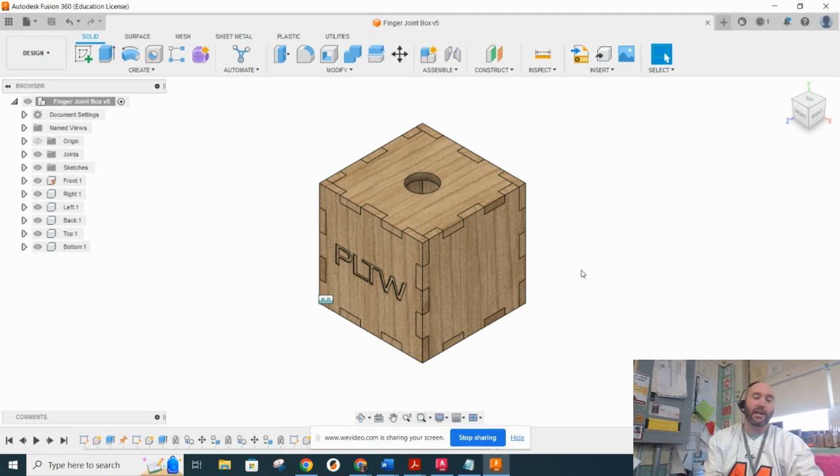What I'm going to do is create a drawing that I can export out into AutoCAD. In order to do that, I'm going to switch this over into my drawing environment, create a drawing from my design, use my own custom title block, and go ahead and say OK.

When this comes in, you can see the front's coming in. I want this to be a full 1-to-1 scale, so I'm going to drop that in there and say OK.

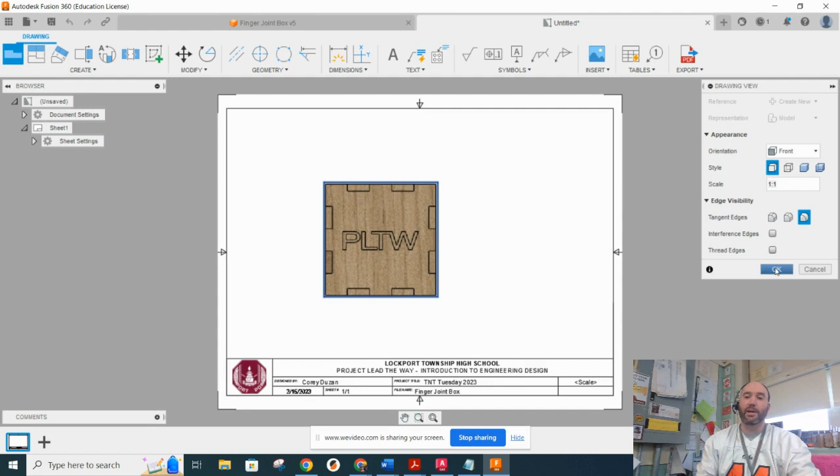Obviously we can see we're going to need 6 sides of this box, and there's not enough room within my sheet. So I'm going to come up here to my sheet, change my sheet size over to something ridiculously big like a D size, and say okay.

There is my front of my box now sitting on my D size. Now, when it comes to my box, I only want the front to show, but I'm seeing the entire assembly.

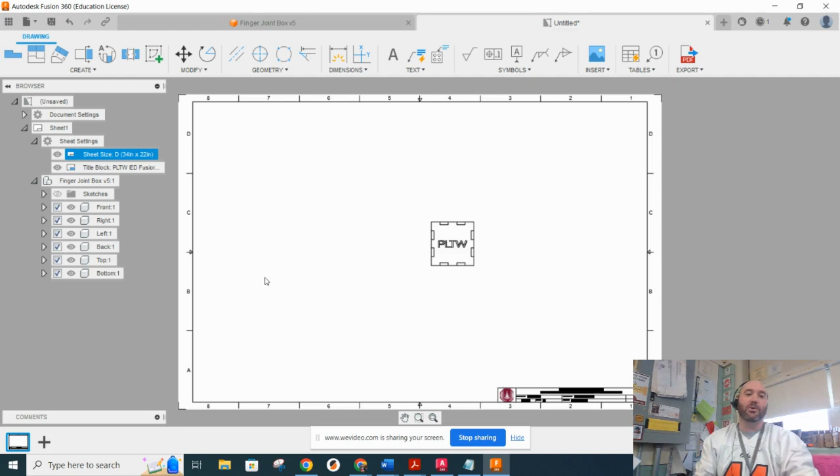So all you have to do is come over here. Whatever you want to get rid of, you can simply hit the eyeball and knock it out. Or I can come over here, hold down shift, grab everything except for front, right click on it and say show hide. There's my front part.

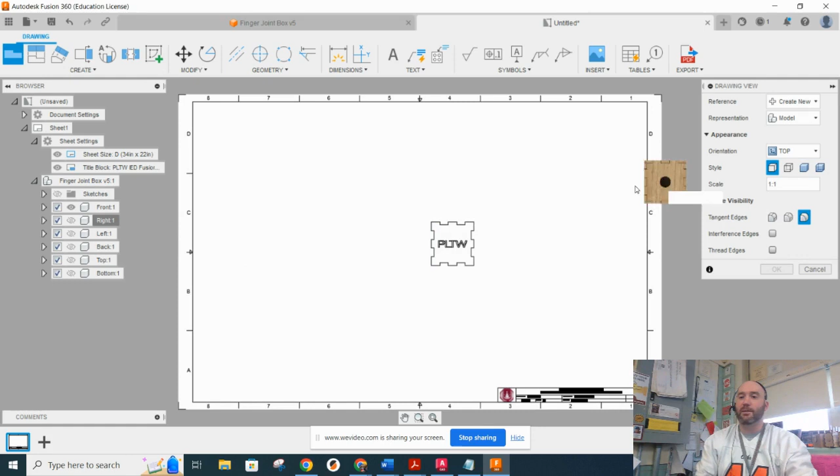I'm now going to create another base view. This time I'm coming up here to my top view, placing that where it needs to go, and saying okay. Now I come down here and shut down everything except for top just by picking show hide, and now it's just the top alone.

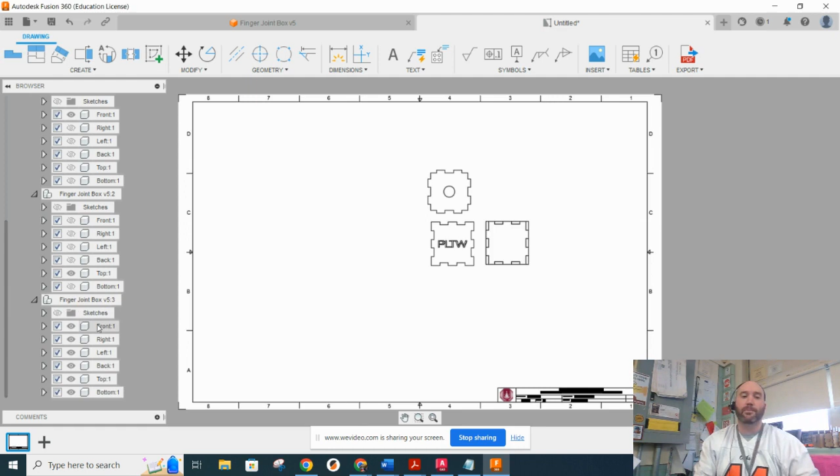I'm going to come here to my base view again, go over to my right side, drop that where it needs to go. I'll scroll down and shut down everything except for my right side view, just like so.

Now I come here to my base view, go to my bottom, place that where it needs to go, scroll down, and now I can shut down everything except for bottom.

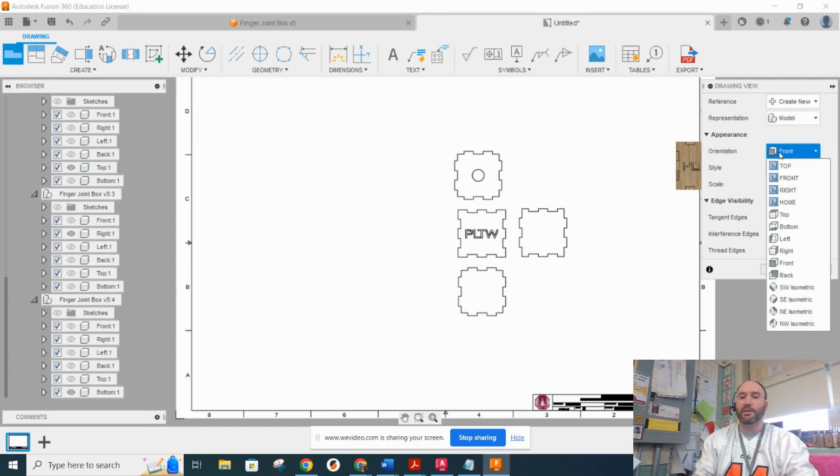I'm going to continue on with this, going to my left side, dropping that in, saying okay, scrolling down, and shutting down everything except for my left. Then finally, I'm going to come here to my base view.

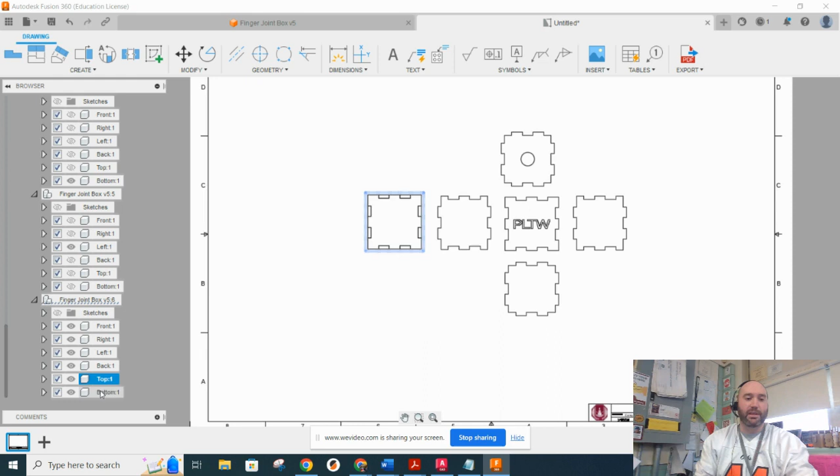Okay, this needs to be my back. I'm going to drop that where it exactly needs to go, scroll down, and shut down everything except for back. All right, so I've just made an orthographic projection of my box. Okay, things are looking pretty good.

So this is when I'm going to come out and do an export, and I'm going to export this out as a DXF. Okay, so it looks like it's going to be saving to my downloads, and I'm going to say that this is my finger joint box for TNT, and I'm going to do a save.

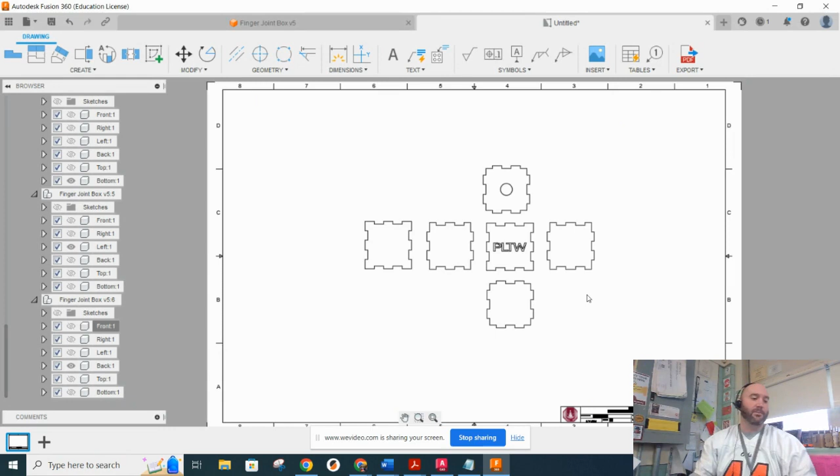All right, so my DXF has been exported out. This is the time when I'm going to be firing up AutoCAD, and I'm just going to simply come out here and open up my TNT finger joint box DXF. I'm going to say open. And this is what it's going to look like in our AutoCAD environment.

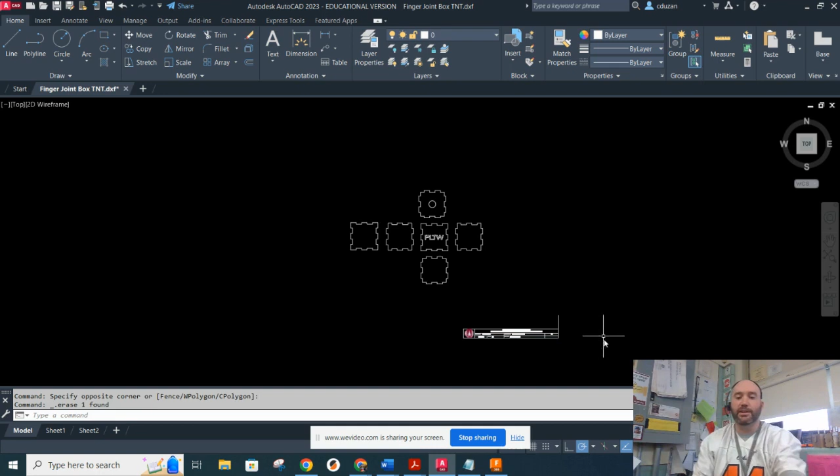All right, so the first thing I'm going to do is I'm just going to come out here and delete out my title block. I don't need any of that. Okay, and now I'm going to start setting up my environment.

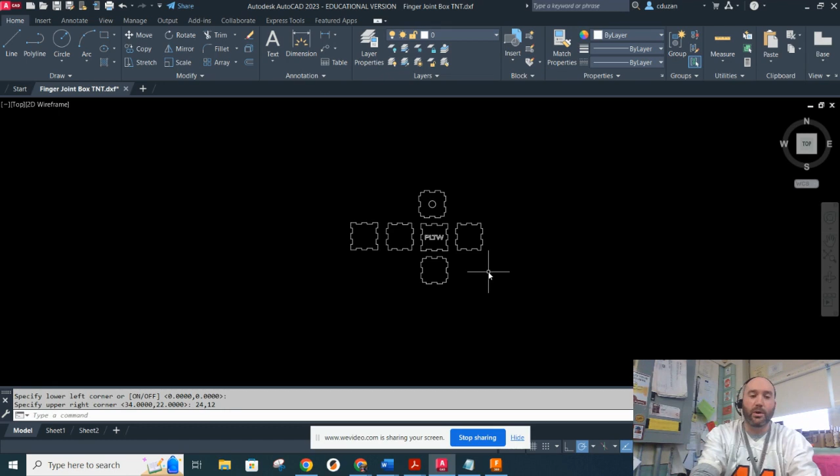So the first thing I'm going to do is type in limits. I'm going to hit enter. My lower left corner, we're always going to keep it 0,0. So I'm going to hit enter on that. And now my upper right hand corner, I'm going to be setting this up for the cutting envelope for my universal laser. So my cutting envelope is going to be 24 comma 12, that's my X and my Y coordinate. I'm going to hit enter. And now I'm going to hit Z enter, A enter to do a zoom all for my limits.

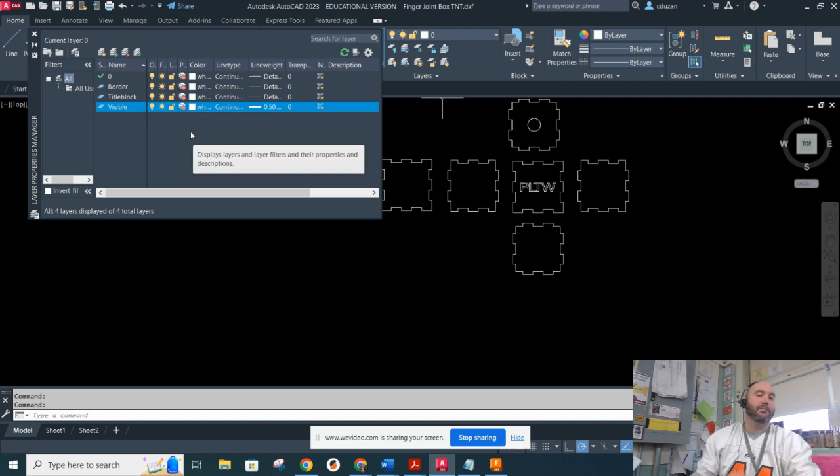Okay, so the next thing I'm going to do is I'm going to start setting up my layers. So I'm going to come up here and go to layer properties. And what I'm going to do first is I'm going to come in here to any layers that we have, and I'm going to turn off their capability of actually printing. I'm just going in there and hitting on the printer. You can see that little sign saying it's no longer going to print.

That's perfect. Now I'm going to create some new layers. So I'm going to right click and say I want to create a new layer. I'm going to call this one cut. Okay, and once I create that new layer called cut, what I'm going to do is make sure it can print. And then I'm going to come here to my little white box and switch up the color on it.

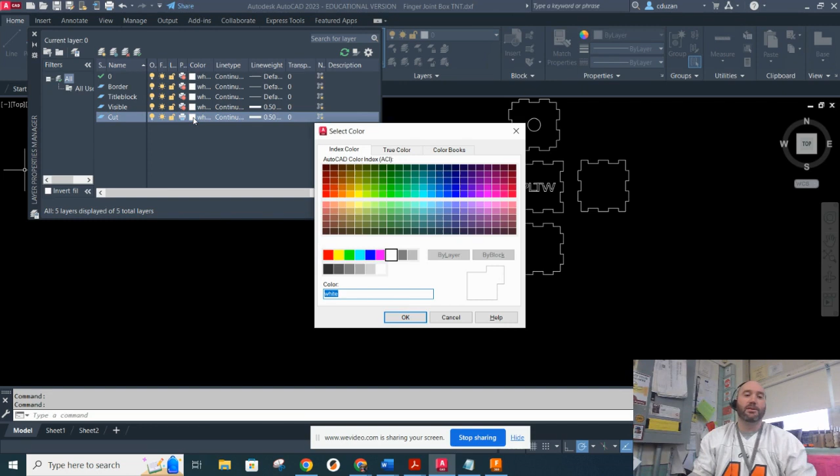So when it comes to colors, we have to make sure we are using index colors down here. So I'm going to say I want this to be a true red, and I'm going to say okay. Most lasers, anything that's going to be red, it's going to be a true cut. The next thing I'm going to do is leave my line type right where it's at with continuous, but my line weight I'm going to say I want that to be a 0 millimeter line weight, and I'm going to say okay.

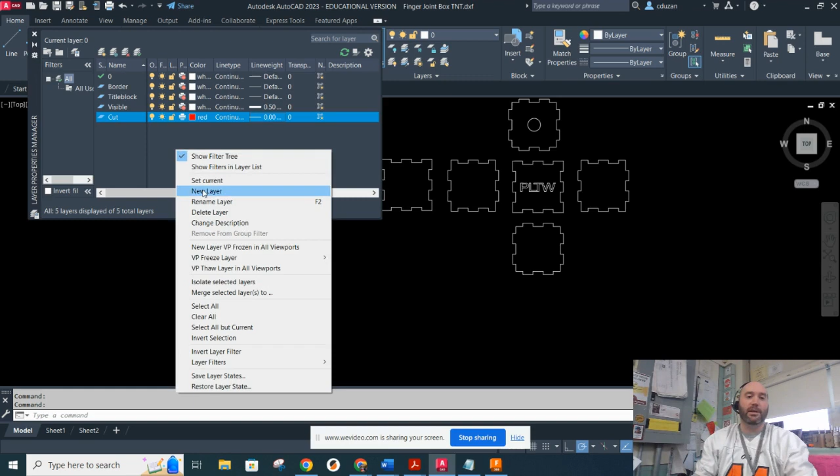Okay, so my cut layer has been created. Now I'm going to right click and say new layer again, but this time this one's going to be my engrave layer. Engrave on most laser cutters is going to be blue. So I'm going to switch my red to a true blue color and say okay, it's a continuous line type and my line weight is sitting at 0.00. All right, so we're looking good.

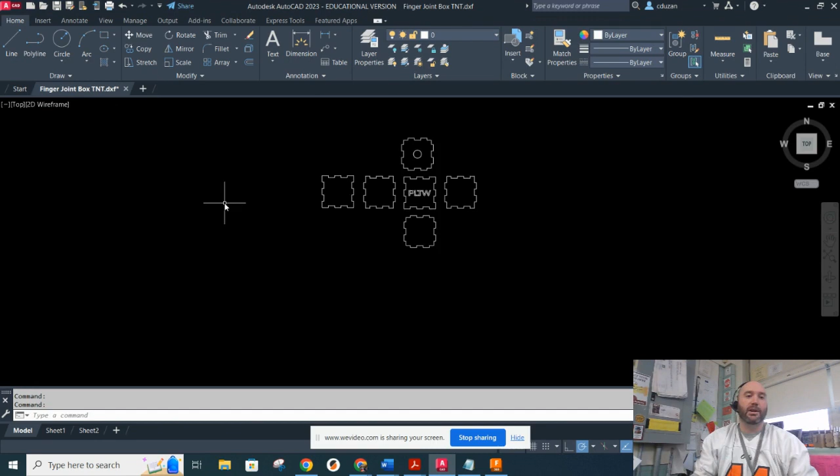All right, so I'm going to go ahead and close out of this. All right, so I'm going to scroll out here just a little bit. Now what I like to do is actually just on the zero layer, and I can see I'm on the zero layer right now, is create a rectangle that needs to start at 0, comma 0. So I'm going to type in 0, comma 0 and hit enter.

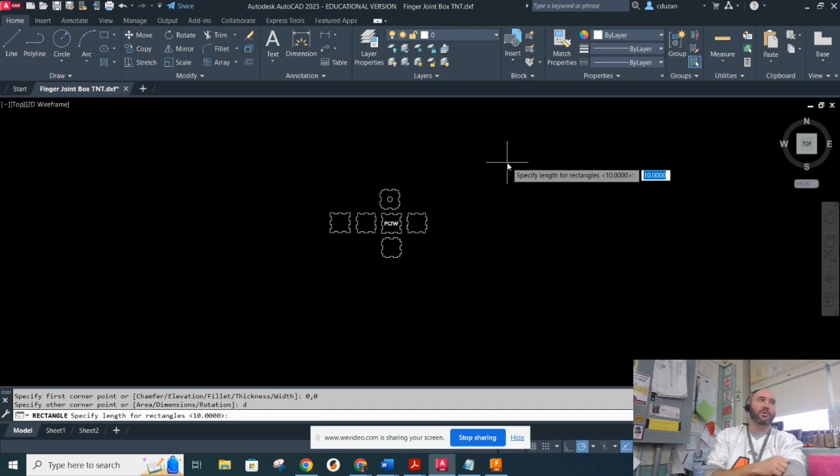Now for my dimensions, I'm going to type in D for dimensions and put in the actual cutting envelope for my printer or my cutter. I'll say 24 is my X, hit enter, and 12 is my Y, hit enter. Now I can just go ahead and place that exactly where it needs to be by picking on the screen.

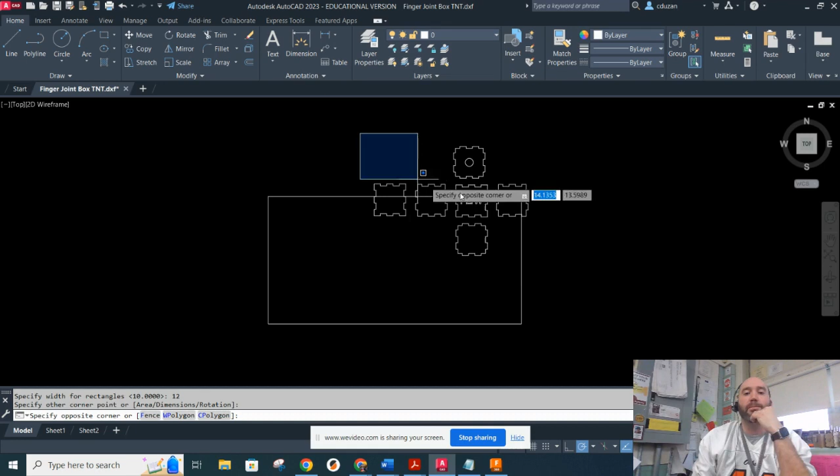So now I'm understanding what the limits of my actual laser cutter are. I'm going to go ahead and grab all this geometry here and hit M to move, and place this inside that cutting envelope.

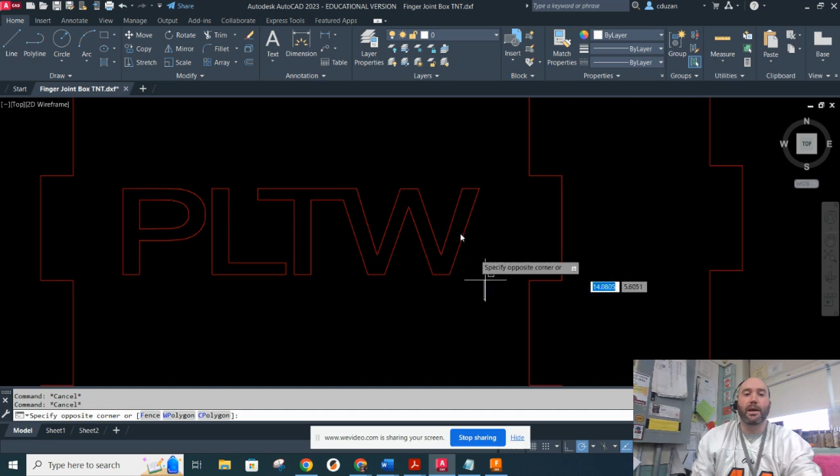Now what I'm going to do is start getting things adjusted here. Obviously I want all this to be on my cut layer, so I'm going to switch it to cut. But the thing is PLTW, I'm going to switch this over to my zero layer, and we'll come back in later and make sure that that is going to be engraved.

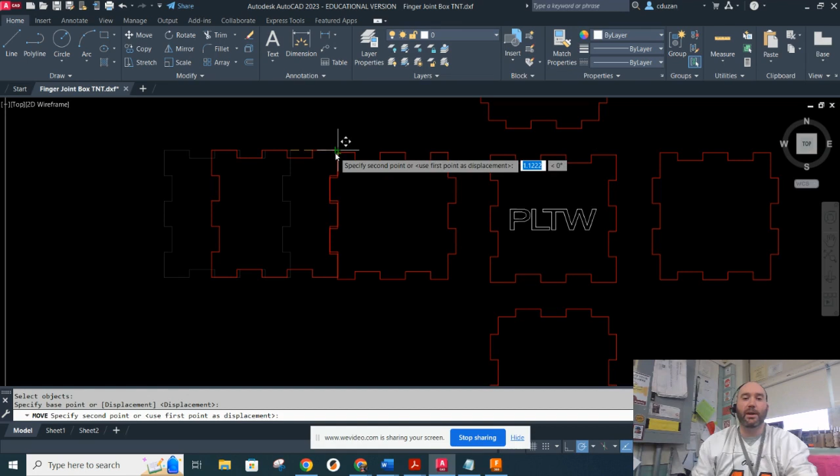Now we've got to do some manipulation of our geometry. We can see that these sides are lining up perfectly. The issue is if I moved this and put it right on top of this right here at this endpoint, that means we're going to have stacked geometry.

I'm going to go ahead and delete that. We can still see that there's one there. Now, the issue with lasers is that we never want to stack geometry, because if they are stacked, that means that laser is going to go there twice. You're going to get a bad burn on that line.

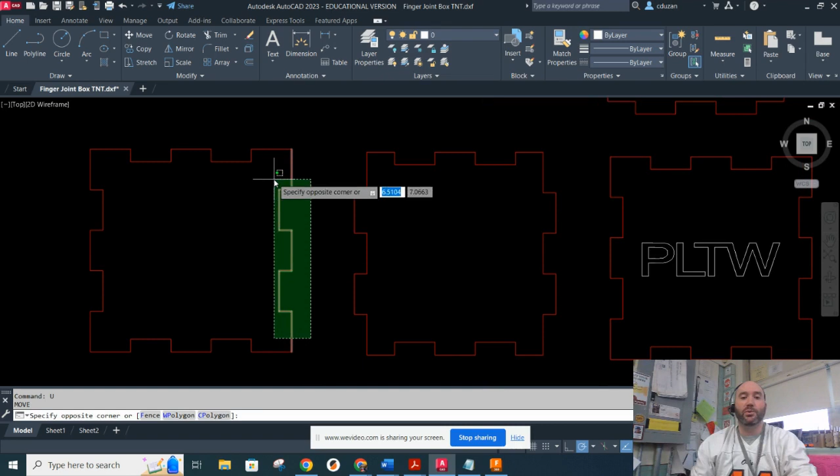So what I'm going to do is come in here, delete this, and now I'm going to move this entire piece from this endpoint to this endpoint. Now we can see it is sharing the same cut line.

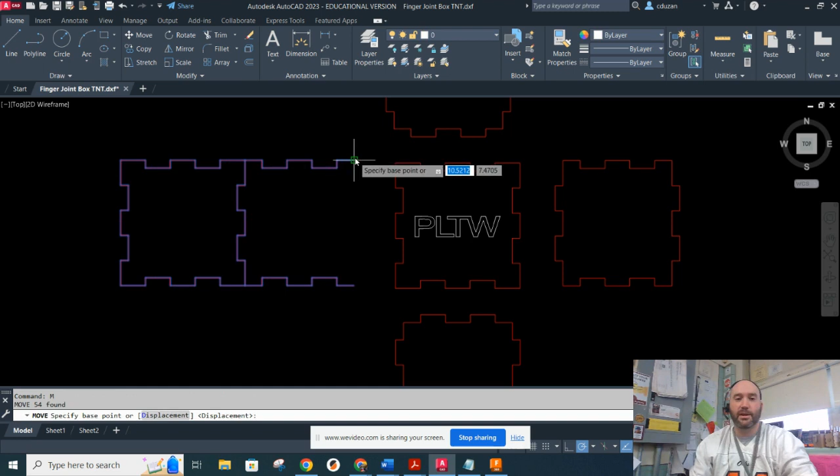It's going to be the same thing here. So I'm going to go ahead and just move all this from here to this endpoint. Grab all this geometry, delete it, and now I'm going to move all this from this endpoint to this endpoint. Now everything is just matching up.

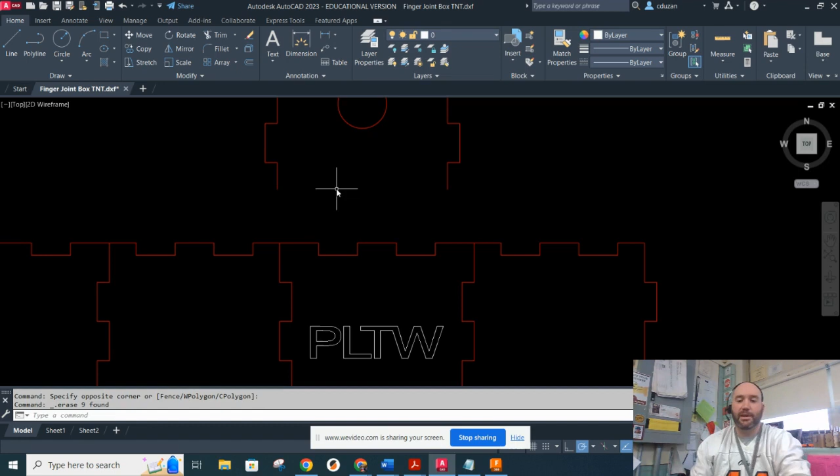I'm going to do the same thing up here, but the problem is that this line is not going to be lining up with this one. So I'm going to do a move. I'm going to select all my geometry and hit enter.

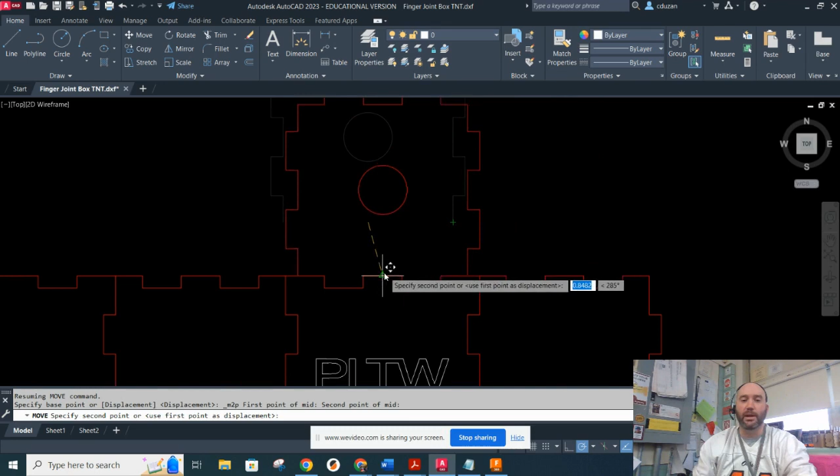Now I'm going to hold down shift, right click, and use something called mid between 2 points. So I'll grab this point, and now it has found the midpoint, and I can simply take this to the midpoint osnap right there. I'm going to do the same thing for the other side.

So M to move, select all this. Shift right click, mid between 2 points. So that point and that point, find the midpoint, and I'm going to take it right here to the midpoint osnap. Now this is all working together.

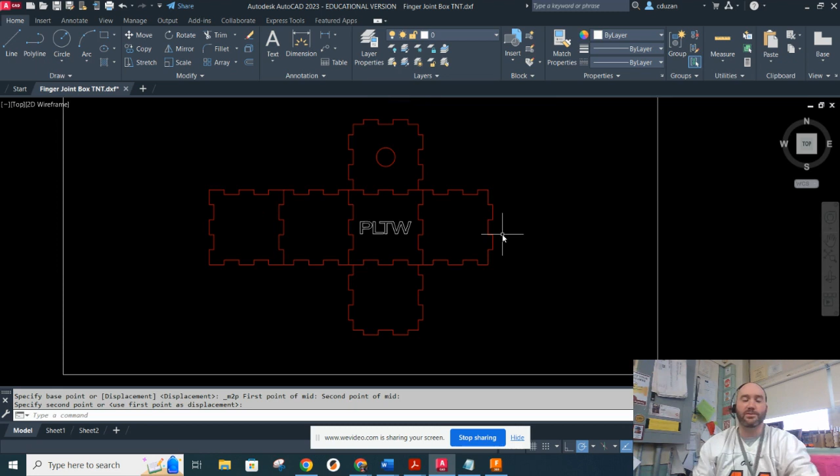We're looking good. Now I can go ahead and do a move and place this down here towards the bottom left-hand corner. So things are looking pretty good.

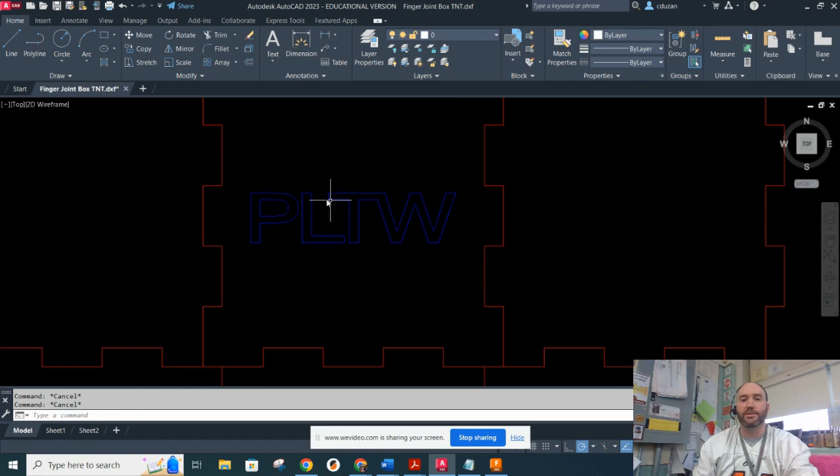Now, if you want to engrave, if you just wanted these lines to engrave on the actual plywood, this is when you could switch this over and take this to engrave and it would engrave it. But a lot of people don't want that. A lot of people want to engrave what's on the inside of this. So if that's the case, I'm going to keep all this on my zero layer.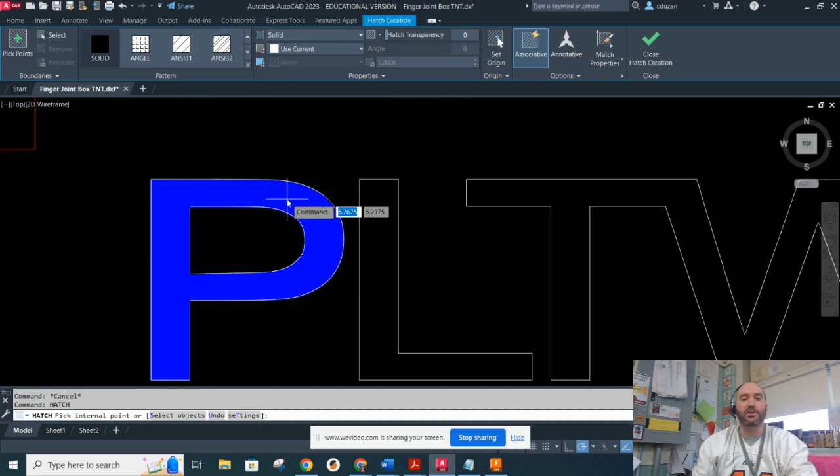Now I'm going to be switching this over to my engrave layer. And now I'm going to type in hatch and hit enter. I'm going to be picking on a solid hatch. I'm just going to go right here to the inside that I want to engrave for all my letters.

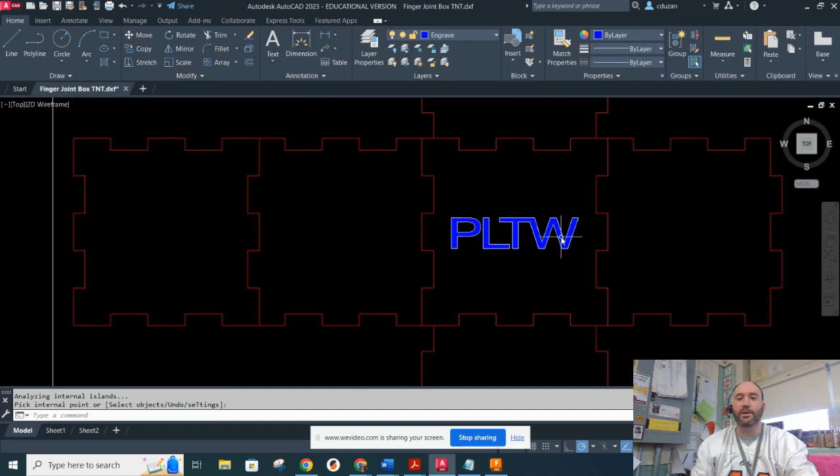Oh, that didn't work. Let's do that again. So hatch here and here, and then let's do it again. Hatch, it's going to be a solid, and let's see if we can come here to the inside of it. There we go. We got it. All right, so now that is just going to engrave by itself.

All right, so we have all of our layers set up. Okay, we have everything good. Looking at my layer properties, nothing is going to cut except for my red and my blue. All right, and then here's how I send this over to the laser. I'm gonna come up here and go into print. I'm gonna be switching this over to my actual laser, which is my VLS 3.6.

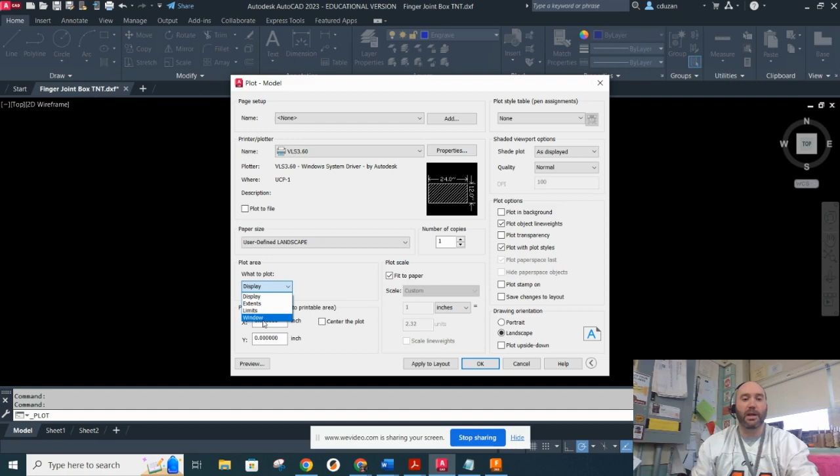And then I'm going to be coming down here to what to plot. I'm going to be saying I want this to be a window. And I'm just going to pick on the top left hand endpoint and the bottom right endpoint. And now I can say my plot scale is going to be 1 inch equals 1 unit. Okay. I'm going to say that my plot style table needs to be AutoCAD. All right. And I think everything else is looking good.

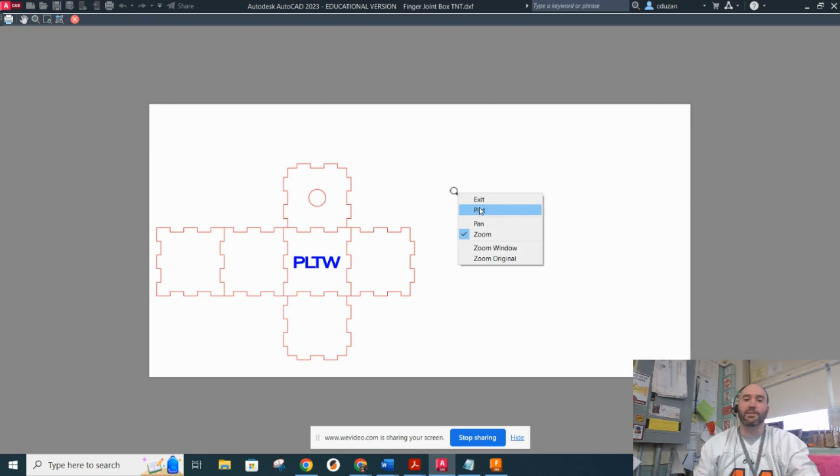So let's go ahead and preview this. Okay. And that's exactly what's going to be sending over to my laser. So I'm going to right click on this and say plot. Okay, and now I'm going to jump over to my software for my laser. I'm going to open this up. All right, and this is what it is we're going to see.

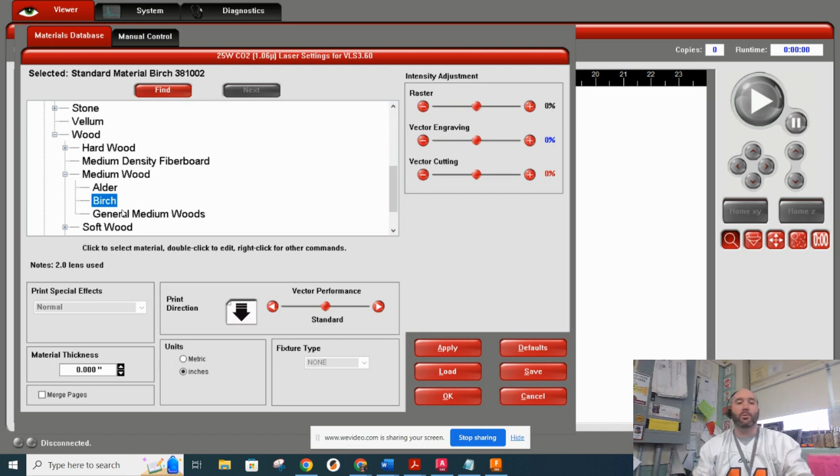Okay, so I know my hatching is going to come over as black. That's not a big deal. All right, that's just going to be a raster. So what I'm going to do is I'm going to come here to my settings. This is for a universal laser, and I'd be coming out and going into natural. And I'd say I want this to be some sort of a wood. And I'm going to say this is a medium wood, and the plywood I'm going to be using is a birch plywood. So I'll select birch. Okay, and then my thickness, this is going to be 0.1875.

I go into my settings here, and I'm just going to look at my manual control. So it looks like it didn't quite grab that. Let's do that again. Let's go into my settings, birch, 0.1875, and let's go ahead and say okay on that. And now let's look at my settings.

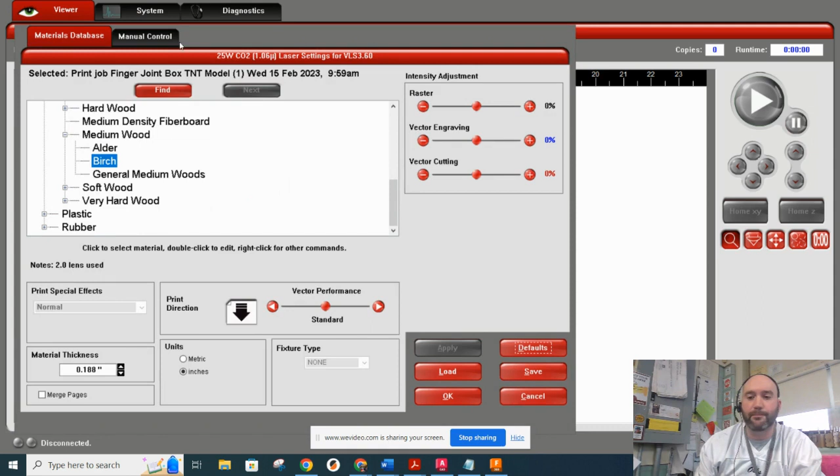So we can see for my cut, it's recommending it's going to be 100% power at 5.4 speed. And then for my raster, it's going to be 100% power at 65% speed. All right. So it's one of those things with laser engraving. Just always be ready for a sacrificial piece just to go out there and try it. And then you can sort of tweak from there. All right. So that's sort of the process that I use.

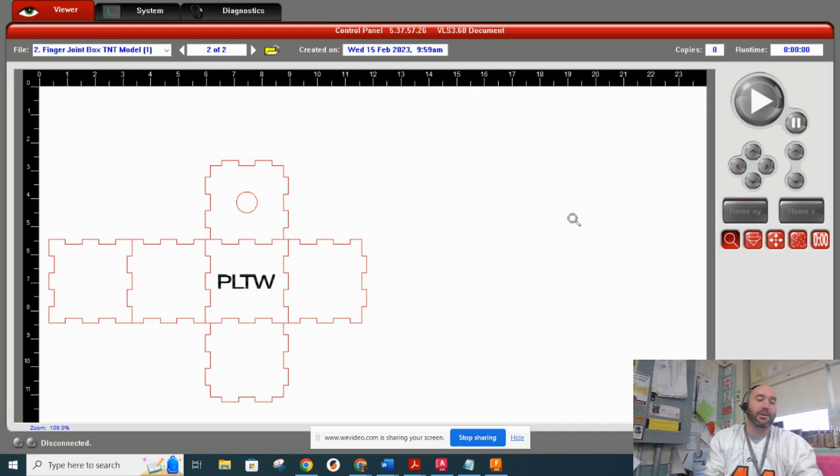A lot of you might be saying, well, then were you kind of talking about waste management? You're right. If I was just making one of these, yeah, I would go out and create like this. But otherwise, if I'm making multiples of this, I'd be probably coming out and doing big batch cuts. All right. So let's take a look at that. So I would be like copying this rectangle over. I'd be coming out and grabbing my design and copying that over.

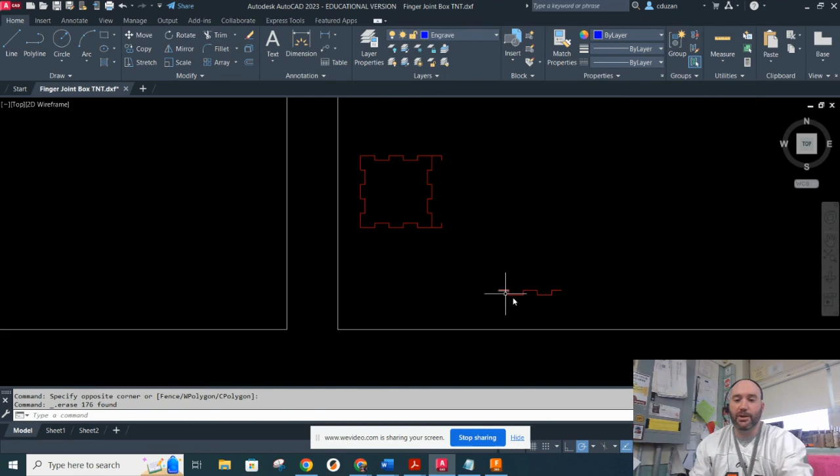If I'm just wanting to do this piece multiple times, I can basically come out here and erase everything that I don't need other than that piece. All right. So I can now move this piece down to my bottom left-hand corner. And then now what I'm going to do is use copy. And once again, we're going to be kind of looking at shared cut lines again, making sure not to have duplicates. So I'm just going to copy that geometry that you see highlighted.

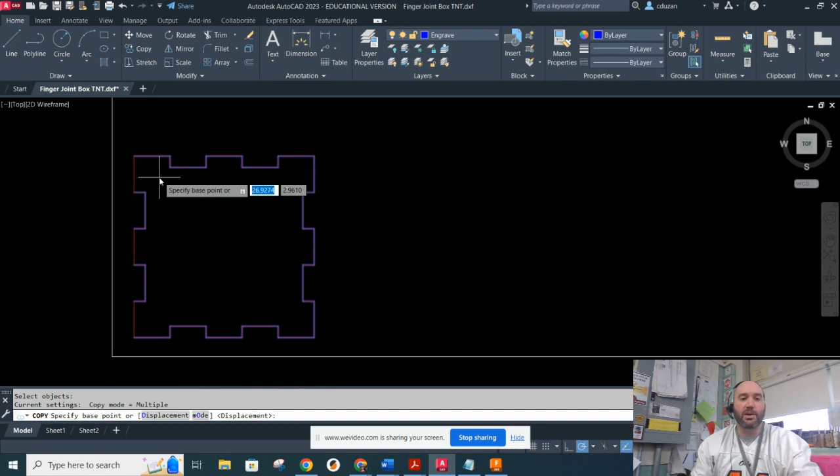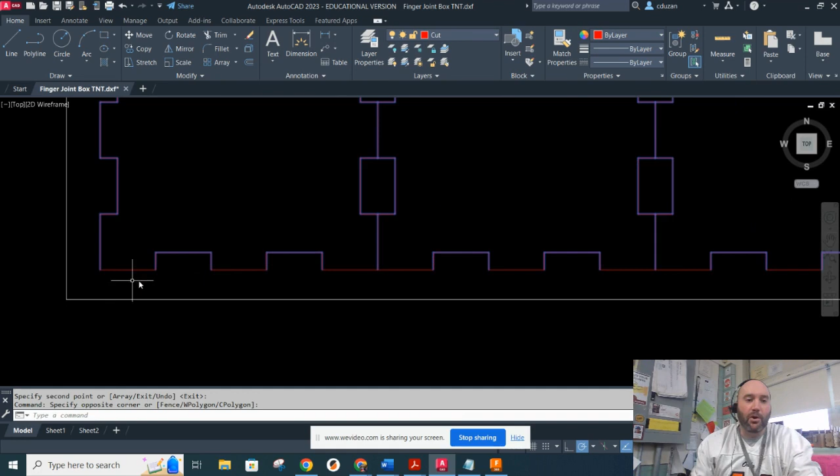I'm going to come to this endpoint and now take it to this endpoint, this endpoint, this endpoint, and we're simply out of room. So everything is just matching up. We're looking good. Okay, I'm going to now come up here and grab all this geometry. Once again, we got to watch out for duplicates.

Okay, and I'm going to have it share the same lines, and I'm just going to stack these on top of each other using my Osnaps. Okay, and now we're getting a big batch there. So 3, 4, 5, 6, 7 times 3, that's 21 pieces just for that one side itself.

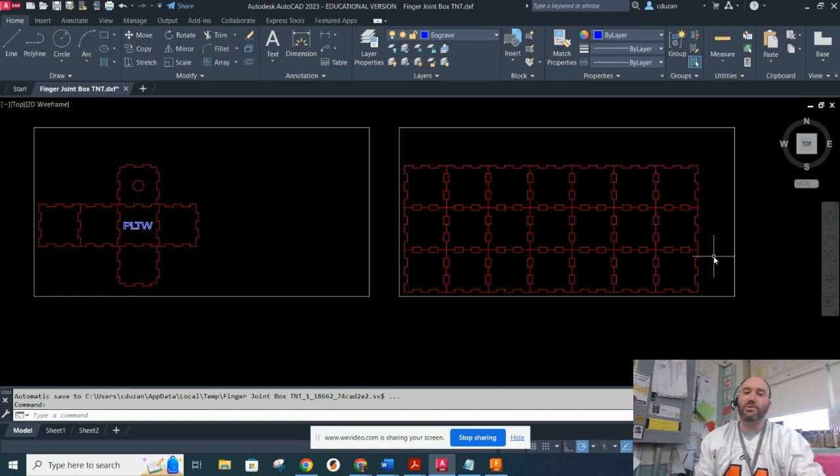Okay, now I understand this is going to be waste here on the outside, but who's to say we can't actually use that again for some other stuff that we're wanting to use? But I mean, look at this. This is minimal waste. For this batch, we're nesting those parts. Okay, let's go ahead and do one more.

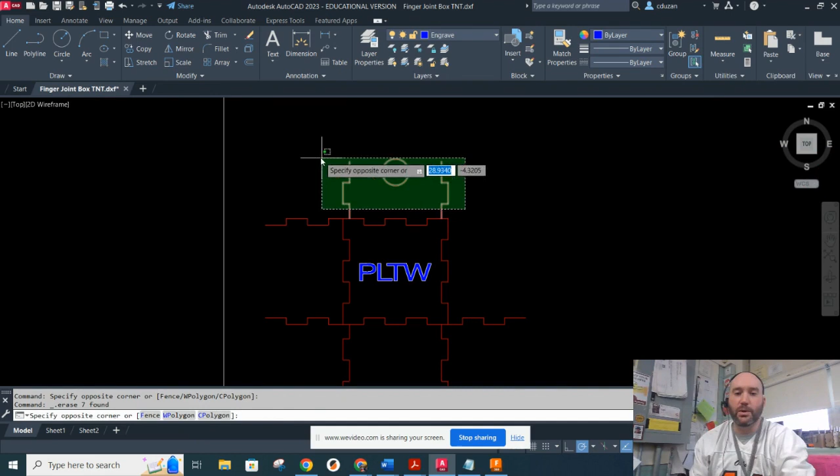Let's go ahead and copy this one down. And in this case, I'm just going to copy this down to here. I'm going to be tearing out what I don't need. So I'm going to go with the front face on this one just to get that PLTW logo. Okay, and moving that into place. And once again, we can go ahead and do a copy.

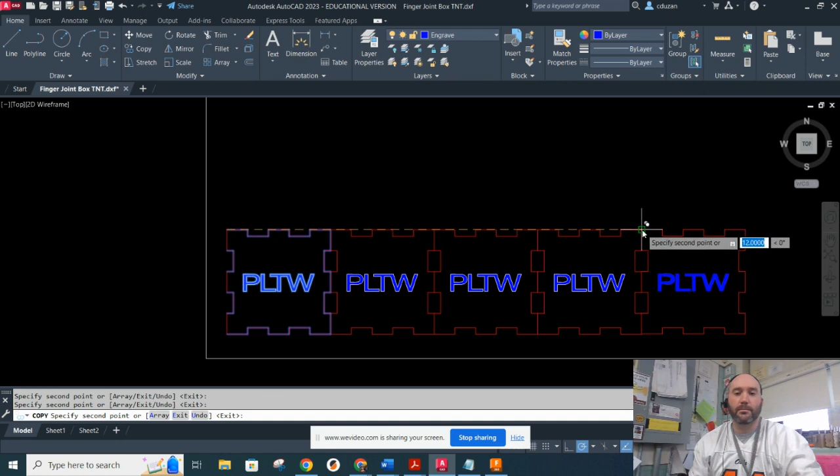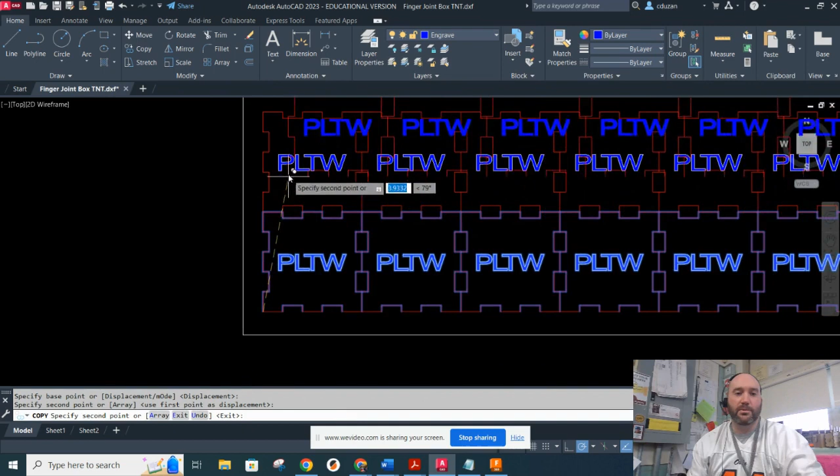And now we can come out here and start copying these endpoint to endpoint. We got one more to go, so we'll drop that in. Okay, and now I can go ahead and grab all the geometry here at the top. Looks like I didn't grab it all. Let's do it one more time. And we will say copy on that. Endpoint up to endpoint to endpoint, and I have my 3 rows there.

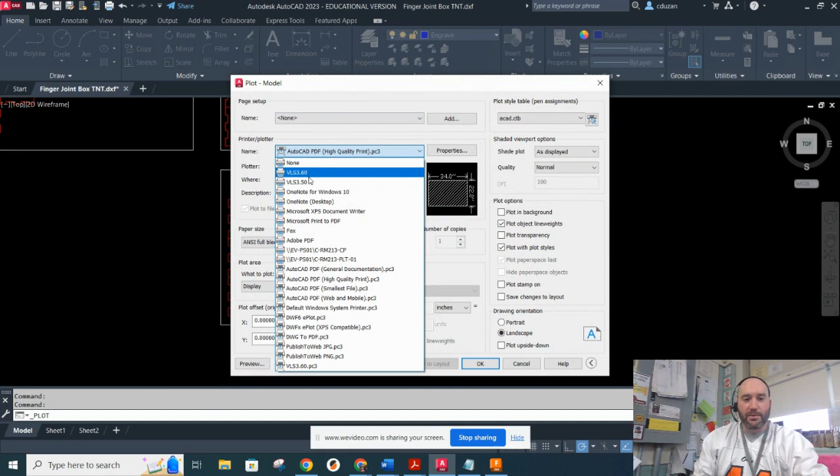Okay, so you can see we're nesting parts. We're getting some nice batches on this. Once again, if I want to laser cut this, all I'm going to do is come up here, go into print. I'm going to be saying I want this to be my laser. I want this to be 1 to 1. What to plot is going to be my window.

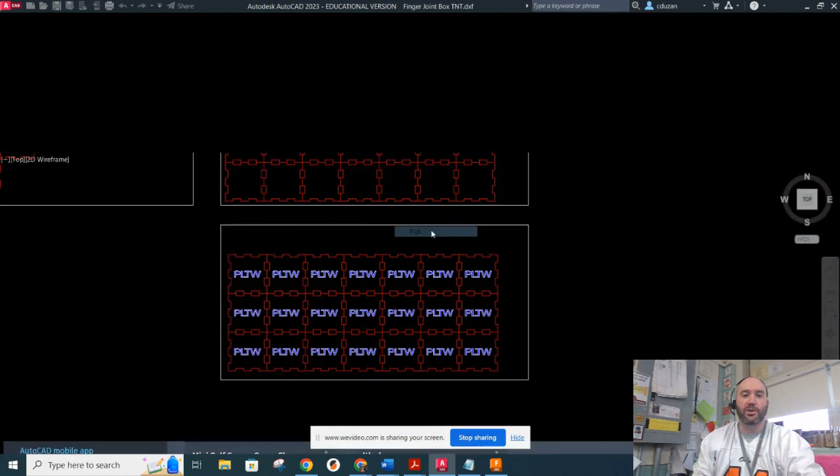And all I have to do is come out here, pick my endpoints of my window. My AutoCAD plot style table, we're good to go. I'm gonna go ahead and hit apply and preview this out. Okay, that's looking good. I can right click and say plot. That's now been sent over to my laser. And now I'm looking at my new design.

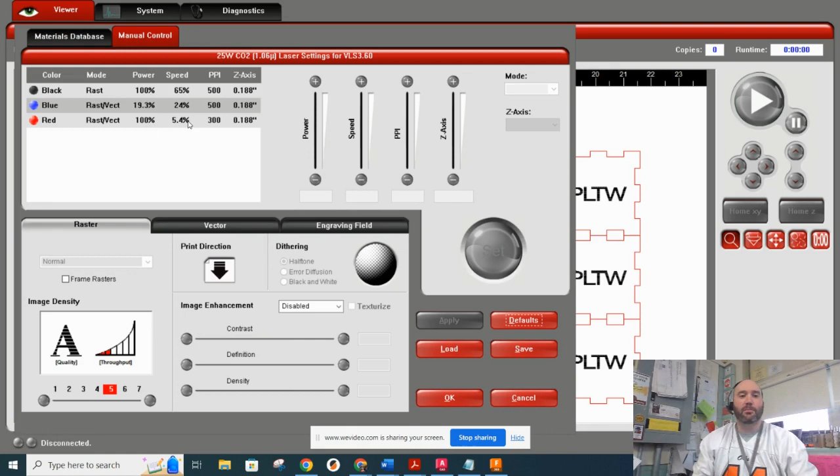I can go into settings. Come here to natural, go into my wood, go into my medium wood. I want this to be birch. My thickness on this is 0.1875, so I can hit apply. And now looking here in my manual control, these are the recommended settings from Universal for my particular laser. And that's what it is going to do. That's how it would look.

So like I said, there's multiple ways of doing this. This is my way of doing it. I was an AutoCAD power user for all those years. I cut my teeth on it. I have a really easy way of just coming out and editing and sort of modifying and manipulating these files. But waste management is going to be very minimum with this method.

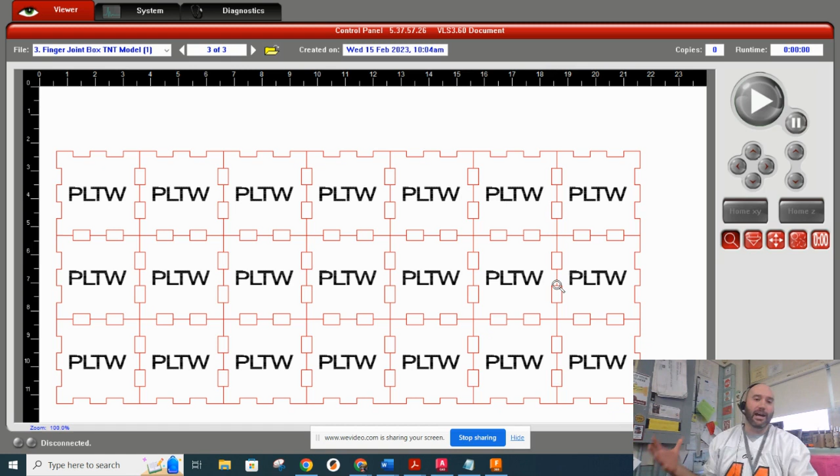You can get a lot of bang for your buck if you're using just cheap plywood, like 3/16 plywood. I can run into Home Depot or wherever I can buy it, and I can get a lot out of that wood. And even the waste that's left over, I still have these 2 borders here. I could use those later on for some other projects if I needed to. So that's a look at my strategy and my way of doing some laser cutting, coming from Fusion into AutoCAD and sending over to my laser.